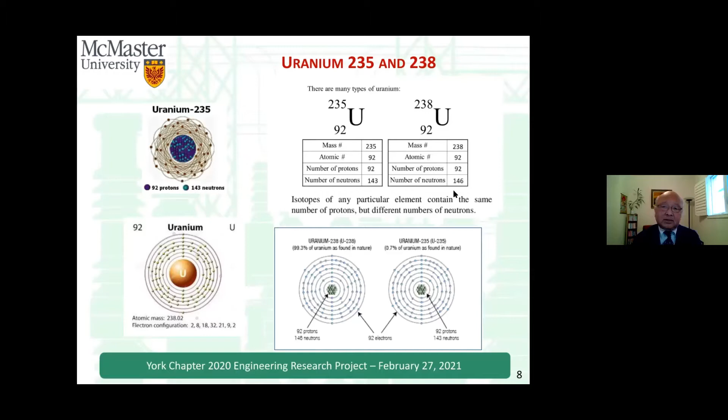Next, the impact of uranium, you've got to understand fission. When you bombard the uranium atom with one active neutron, it splits, generating more uranium isotopes, it could be 236, 238, radium, or other active nuclear elements. When it does that, it releases a lot of energy in addition to extra protons and neutrons. These neutrons, if allowed to bombard the next uranium nuclei, will cause it to split, releasing more neutrons, more energy, and more gamma rays.

And then the whole process is fission. It creates a chain reaction. This is what we find in a nuclear bomb. So what do we do? We have to control the process, the chain reaction.

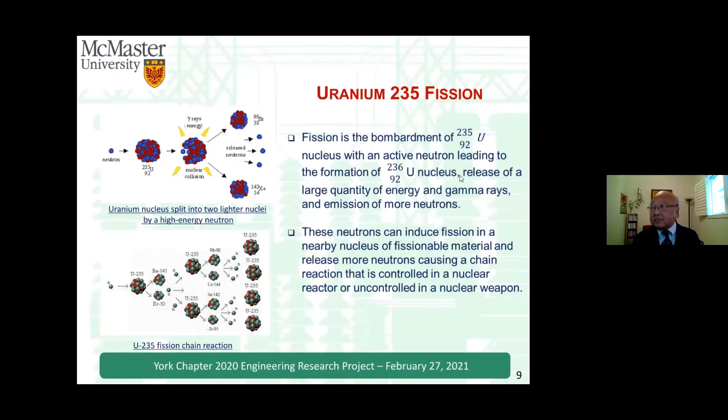Next slide, please. This is what the nuclear fuel looks like. It comes in pellets, and they are all lined up inside the uranium rod. This is what it looks like in a nuclear reactor.

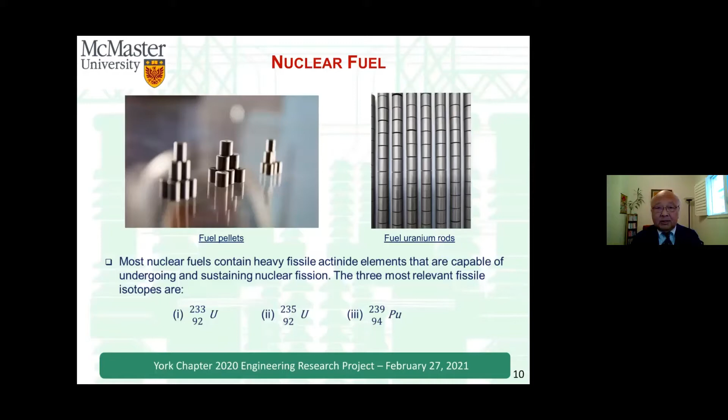Next slide, please. Inside the reactor, to control and make sure that the neutrons do not bombard and cause a chain reaction, we have control rods. These control rods are made of boron, cadmium, hafnium, or other elements that absorb the neutrons to prevent reacting.

So if you allow the control rod to sit inside the reactor right down to the bottom, it will absorb the neutrons. If you do not bombard the elements, the whole thing stays stagnant, it stays as is. The minute you bombard with a neutron, the reaction starts.

By allowing the control rod to move up and down, you can control the amount of energy generated from the reactor itself. Next slide, please.

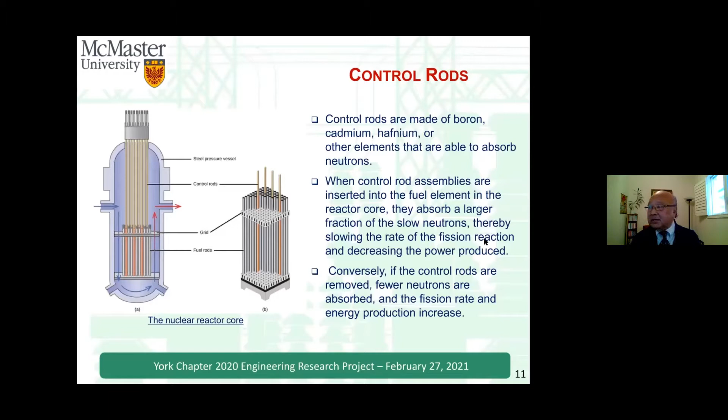So there's a lot of research done all over the world on these small modular reactors. The one I'm going to address today are the 5 reactors being developed in different countries: the US, Canada, China, Germany, England, India, etc.

The first one I'll look at is the water-cooled reactor. Next slide, please. This reactor is water-cooled. It can generate up to 60 megawatts of electricity, reach core temperatures of about 314 degrees C, and uses enriched fuel, only 5%, using uranium dioxide. This is one of the SMRs being looked into.

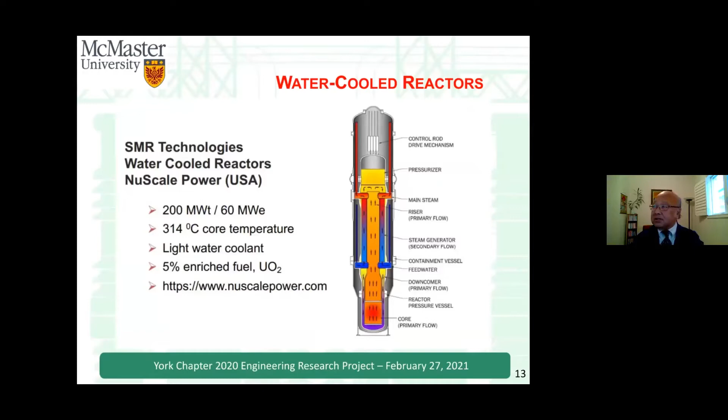Next slide, please. We have the high temperature gas reactors. It can generate up to 272 megawatts with a core temperature of 750 degrees C, and uses helium as a coolant. It uses only 20% enriched fuel, using what we call TRISO fuel, standing for tristructural isotropic fuel. This is done by a company in the US named Framatome.

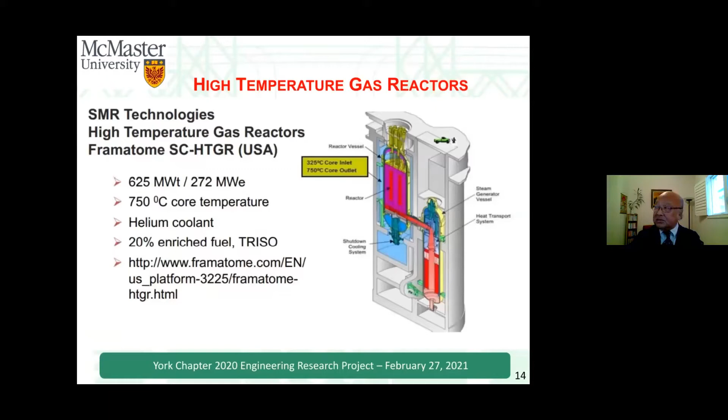Next slide, please. In this new SMR, they use liquid metal for a fast neutron reactor. It can generate up to 100 megawatts of electricity, core temperature 510 degrees C, using sodium as a coolant. Again, they use only 17% enriched fuel, using uranium-zirconium alloy.

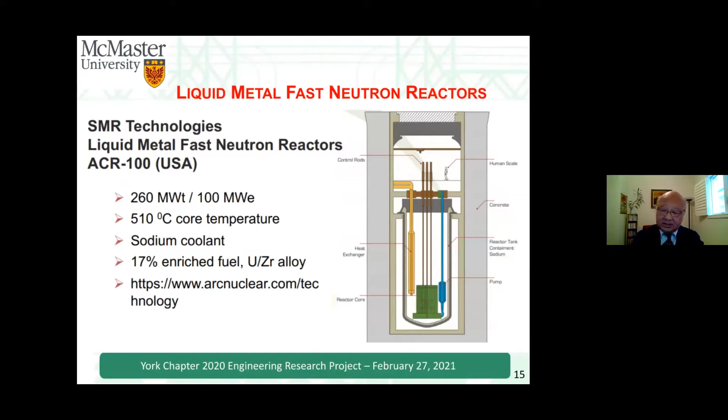So all these nuclear reactions and the energy released from the uranium is harnessed to boil water, we get steam, and the steam drives the turbines and hence generates electricity.

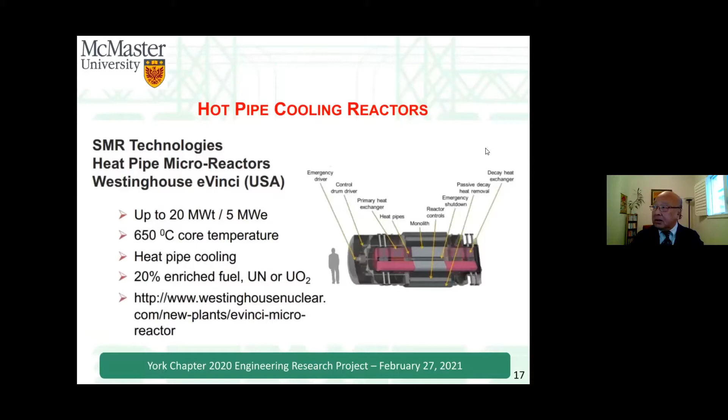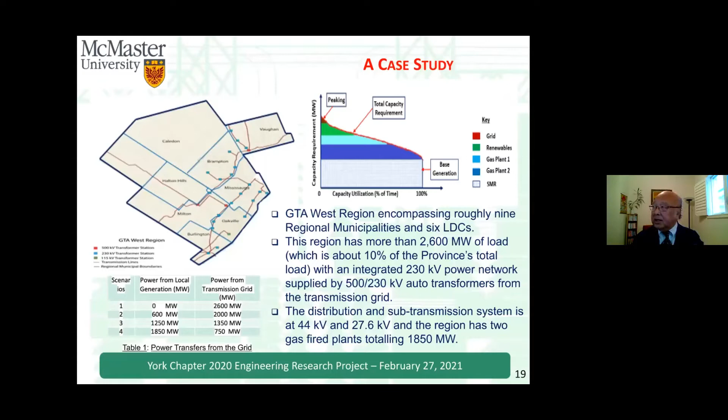Oh yeah, okay. Now on page 19, we do a case study. What happens if you were to replace the power that we import from the grid? Can we use it? If we do, OPG would reduce the amount of fuel used to generate power. The SMR on page 20 replaces the grid. If we have the generators going from the SMR, we reduce the power import from the grid from T1 and T2.

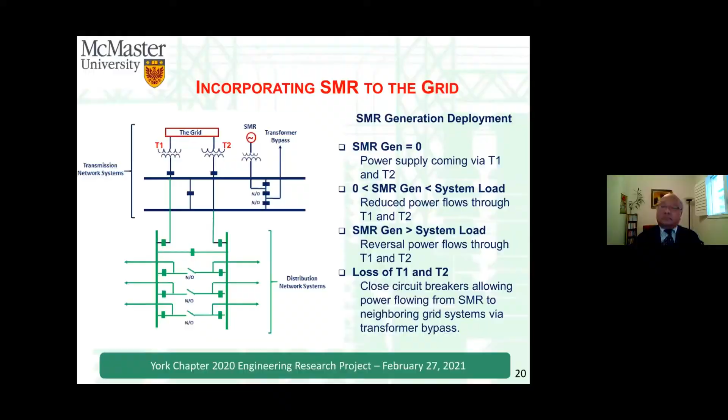Maybe you could give us a better sense of the connections between the climate change solution and the reactors. Are you thinking this is a replacement way of energy generation, or let us know more about how you're connecting the SMRs as the solution for climate change?

Well, everybody believes that going for renewables alone will help combat climate change. No, it will not. Using electric cars won't affect much in terms of climate change because we don't have the structure for it. All households are equipped with 100 amp circuit breakers, new homes 200, but you need more than that. You have to bring in new connections, new wire, new cables in order to use electric cars.

The idea is we have a lot of old generation at the nuclear stations in Darlington and Pickering. These are getting old, so OPG with the government and AECL are working on these small reactors. It occupies only about 5 acres and is relatively safe. If we can use it and have it interconnected within the GTA across northern, eastern, western areas, then we will be less dependent on gas generators. This is one way of combating climate change.

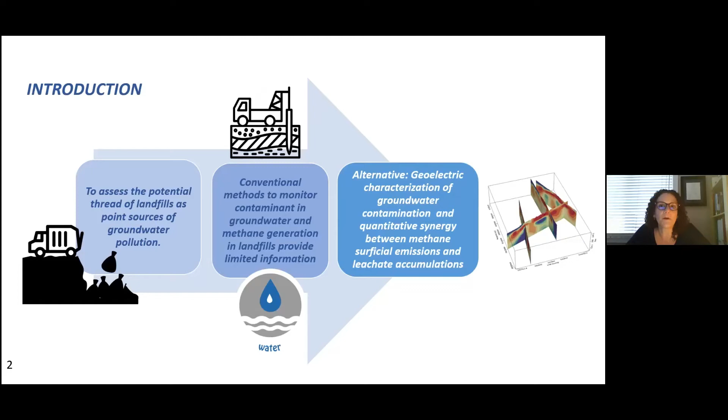It is recognized by the United Nations, by provincial and federal jurisdictions, and also by the Assembly of First Nations that safe drinking water is a main priority, especially for rural communities and urban communities that depend on groundwater as the main source of drinking water.

The advantage of the method we're proposing is that it's non-invasive, low-cost, and will accurately delineate contaminated fluids and gas plume migration. The field data analysis is available immediately after the field work, which makes this a good technique because it helps fast responses to the problem. The quality of the data and the graphical, detailed information will be used for prevention, mitigation, or remediation of contaminated sites.

The methodology of the project was: first we collected a series of geoelectrical tomographs of the subsoil in the landfill. Simultaneously, we collected about 140 methane readings or concentration readings on the surface. Then, using machine learning, we created a model that produced the synergy between methane readings and geoelectrical information.

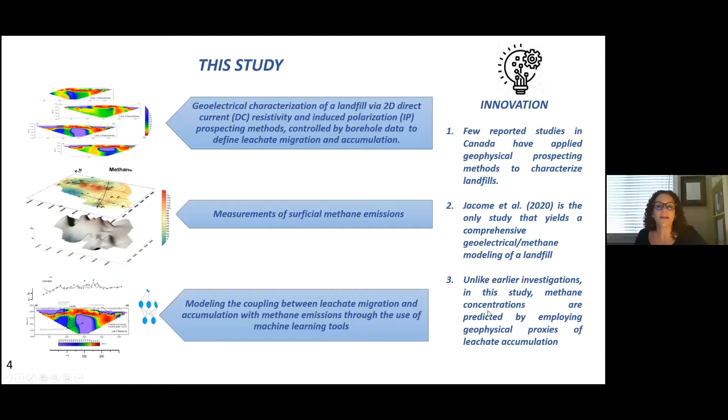The landfill is located in Northeast Toronto, and here are the geomorphological features of the landfill. In this map you can see the topographic map showing the location of the geoelectrical cross sections. Three of them are located in the same direction as the groundwater, and one is located parallel to the landfill.

These geoelectrical cross-sections are about 300 meters in length, and we collected in less than a week more than 5,500 readings of geoelectrical information from the site. Also, at this well, our industry partner collected geophysical well log information that was used to control our geoelectrical modeling.

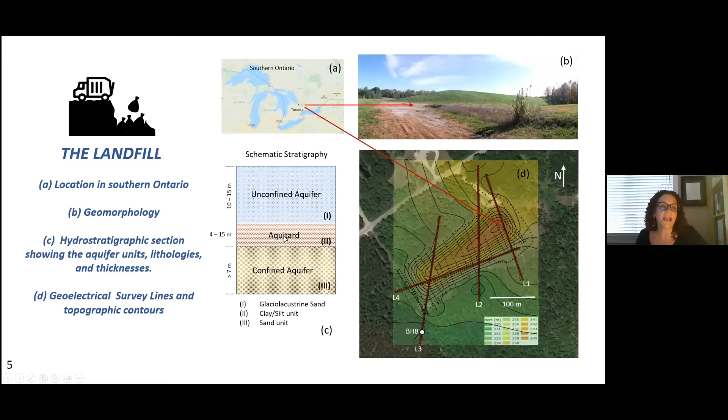The landfill is located in a shallow, unconfined aquifer, and there is a confined aquifer that is divided by an aquitard, a layer of clay and silt.

Here is the result of the geoelectrical cross sections, showing different scales or resistivity values of the subsoil. Red and orange are low resistivity values, associated with saturated soil with salty water or contaminated water. Whereas blues, purples, and greens are medium to high resistivity values, associated with non-saturated soil or soil saturated with fresh water.

The final result of this project was a model done using machine learning, where we use high conductivity values as proxies of contaminated area or contaminated leachate, what we call the waste stabilization zone. As you can see, there is a good match between the observed methane readings, shown as crosses, and the predicted methane concentrations. As a conclusion of these models, we're showing only two examples.

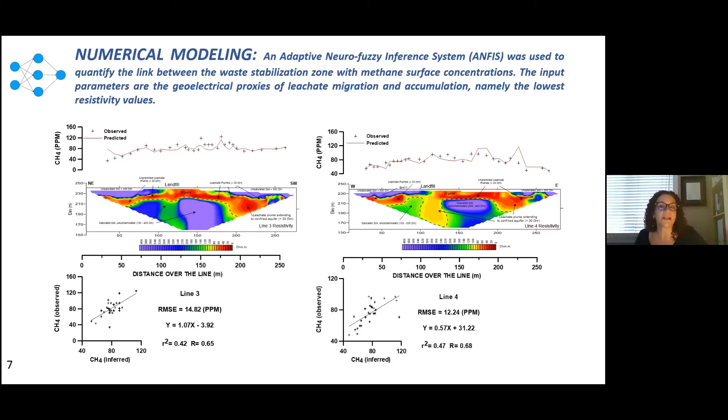We can say that methane readings on the surface can be used as a first approximation of the location of the contaminated fluids underground.

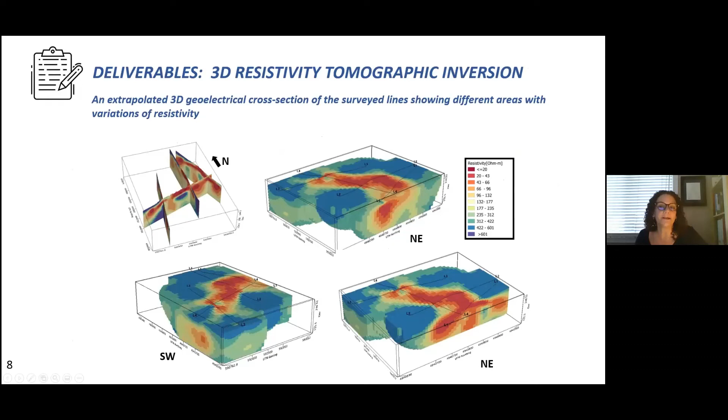Here is a 3D extrapolation of the four geoelectrical tomographs, and as you can see, the quality of information is quite good. We can generate a 3D cube and see and map exactly the location of the contaminated plume. In this particular case, we also found a new plume that was not previously detected by conventional monitoring wells.

Similarly, if we want to drill a monitoring well in the ground, it's a good idea to have a very clear image of the subsurface or the landfill site. This is very important because it helps us drill efficiently where the monitoring wells should be, and it also helps design a more accurate remediation campaign.

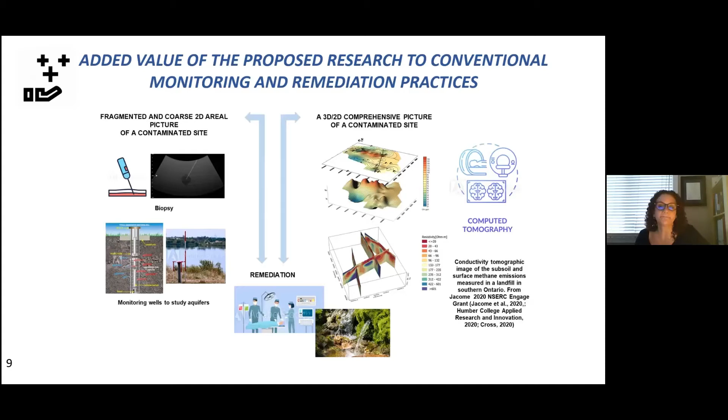Cost studies show that conventional monitoring per well costs about 3 times more than a geoelectrical methane survey of a line of about 300 meters.

Only in the GTA, there are more than 160 closed landfills, and the monitoring cost of these landfills throughout the life of the landfill is about 120 million after they close. So that is actually assumed by the taxpayer.

In particular, in the York region, there is a small landfill in Markham that costs about $150,000 to monitor per year. These figures increase annually and become very important, a financial burden on taxpayers.

Geophysics technologies, or the geophysical method, has been used traditionally by the mining, oil, and gas industries. However, civil and environmental engineers are now actually adopting these techniques in order to monitor landfills.

The main challenge that we found is resistance to change, or resistance to changing the paradigms.

As a conclusion, I can say that this method provides a comprehensive and continuous view of the landfill, which is an advantage over the fragmented picture of conventional monitoring. It improves landfill characterization and monitoring techniques at a significantly lower cost and reduced time, which translates into savings for taxpayers, and helps to make rapid decisions about prevention, mitigation, and remediation of contaminated sites.

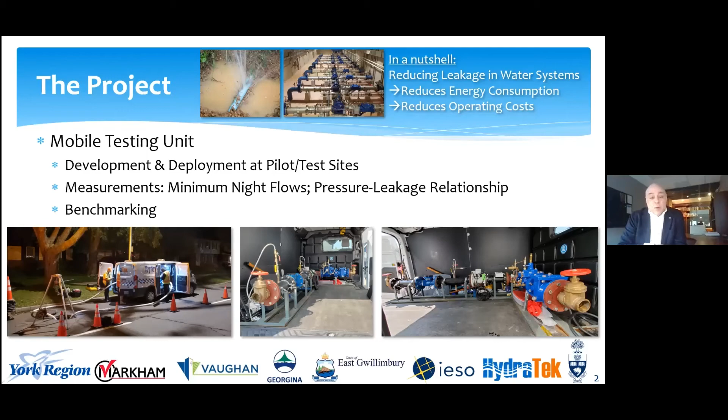To that end, this project involved the development and deployment of a mobile testing unit, pictured here. Its function is to obtain key measurements that can diagnose whether a test site is performing well or poorly from a leakage point of view.

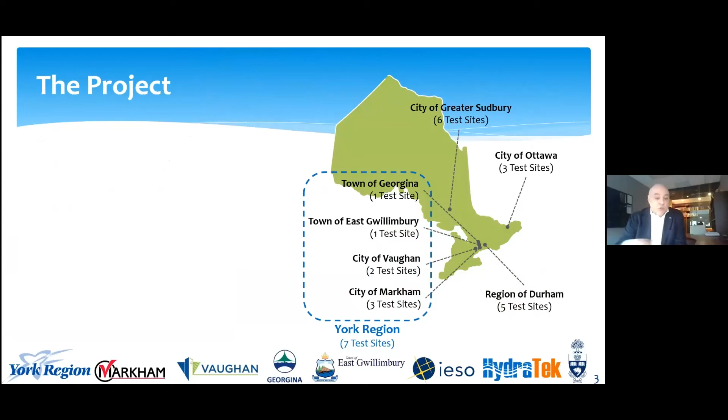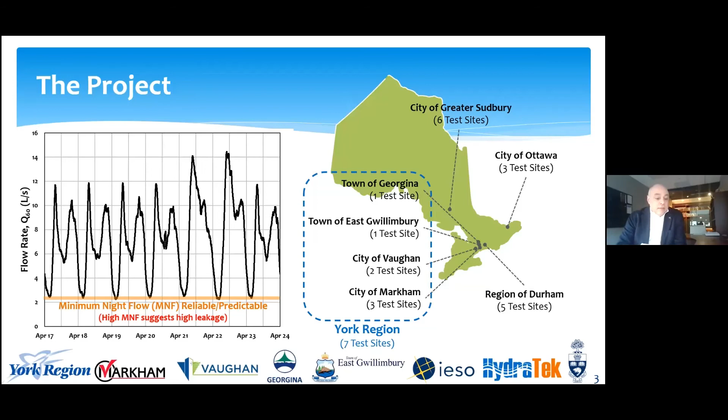This plot shows what several days of water flowing into a typical test area would look like. One of the key underlying technical principles is that the minimum night flow in our water systems, as identified by the horizontal orange line in this plot, is both predictable and reliable. A high minimum night flow is indicative of excessive leakage.

A quick word about the key players involved. Bradley Jenks was the principal researcher for this project, which formed the cornerstone of his Master of Applied Science degree in Civil Engineering from the University of Toronto, under the academic supervision of Dr. Bryan Karney.

HydraTek and Associates was the project's industrial partner, and I was the responsible engineer on the project. The whole project was made possible through the financial support of the Independent Electricity System Operator of Ontario, IESO, through its Grid Innovation Fund, in recognition of the amount of energy needed for water supply to our cities and towns.

Additional funding was supplied by the National Research Council's Industrial Research Assistance Program, the Natural Sciences and Engineering Research Council, and the Mitacs Accelerate Program. Quite importantly, the support from participating municipalities in providing test sites, as well as engineering and operations staff time, was critical for the success of this project.

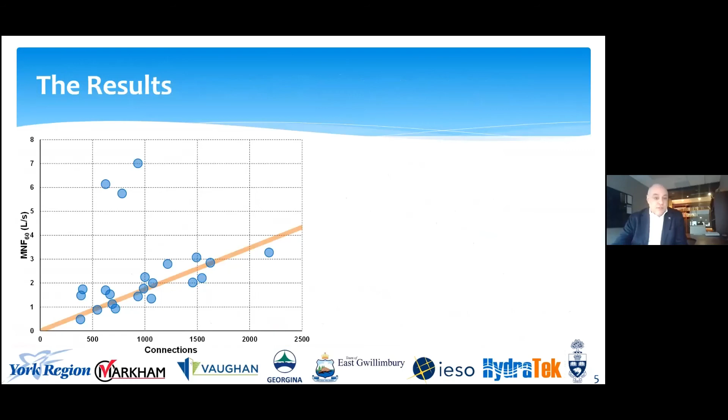Here's a snapshot of some of the key results. This plot shows the minimum night flows for each of the test sites that were looked at. As you can see, there is a large cluster that lies roughly along a linear trend line, which can be classified as generally healthy test sites, and from which we can establish an industry benchmark.

There are also some very clear outliers. These are the ones we're most concerned about. This metric alone can diagnose whether test sites have excessive leakage, as well as roughly the amount of that leakage.

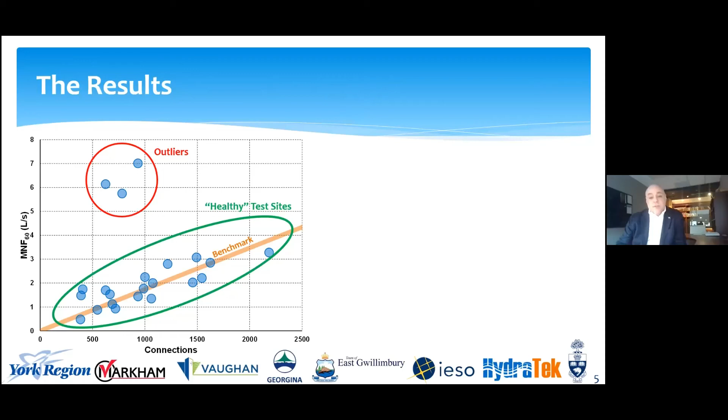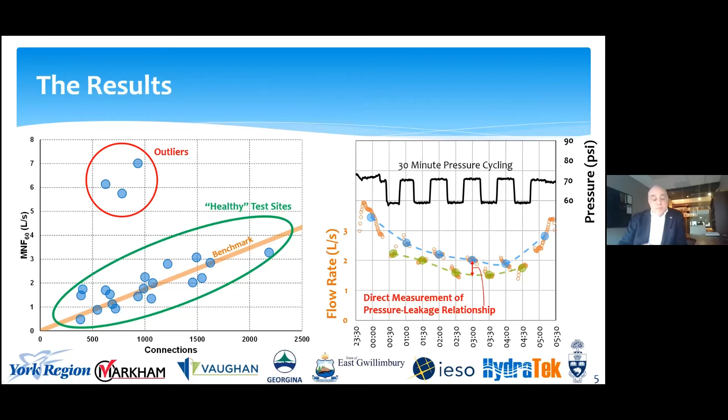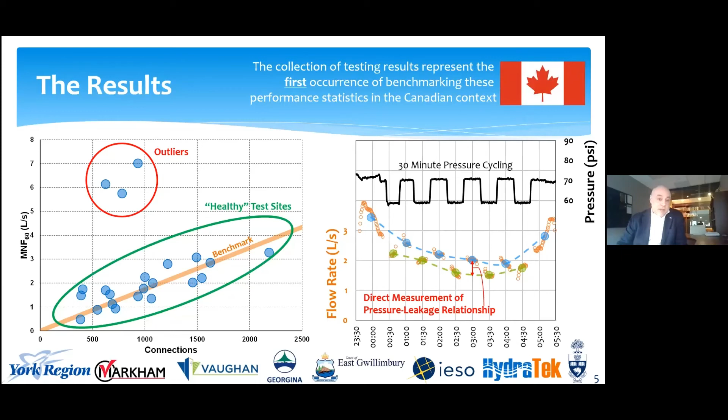This is the first time that any such benchmarking has been undertaken in Canada, as well as North America for that matter. And that's important, because the design of our systems is quite a bit different from other parts of the world.

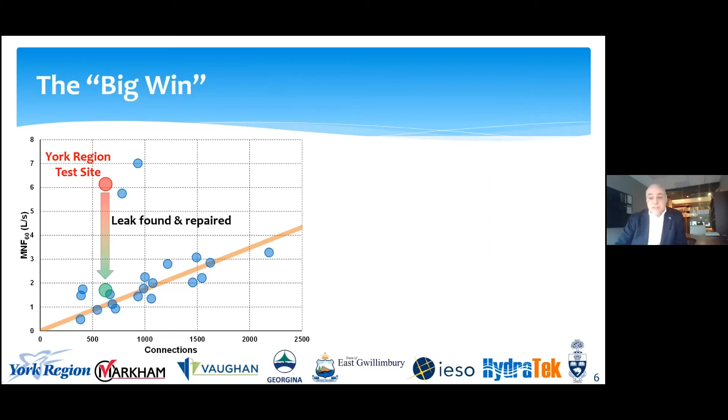So here we see the true proof of concept for this research project, provided by one of the test sites whose initial results were represented by one of those outliers. The municipality used those findings and focused its efforts to find and repair a significant leak. After retesting the site, its performance matched that of its healthier peers. This was quite an exciting outcome, resulting in savings of a staggering 140,000 cubic meters a year.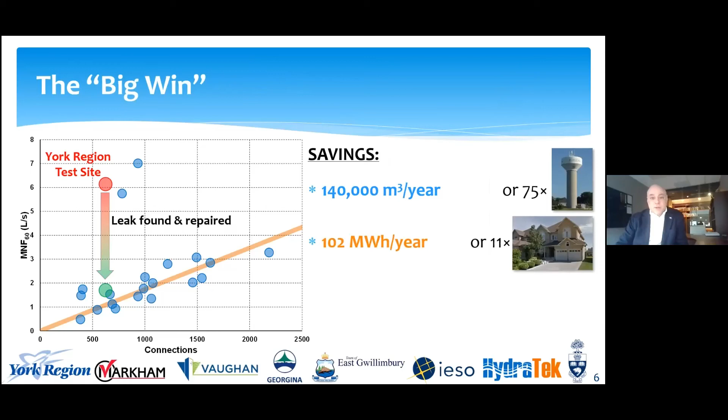That's 140 million liters a year, or about the equivalent of 75 of those elevated tanks you see on the screen — the amount of volume per year that was being lost through that particular leak. It amounts to 102 megawatt hours a year, or 5 tons of carbon dioxide in terms of greenhouse gases, or enough to power 11 of my homes in a given year.

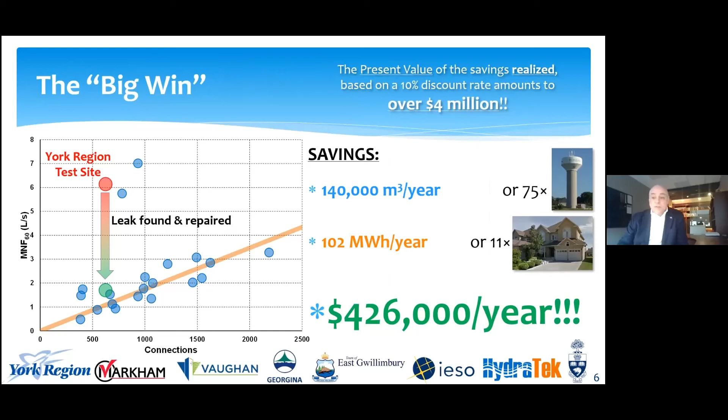Quite dramatically, the financial savings is really where the attention is on this particular slide. The annual savings here is $426,000 a year, the equivalent present value of which was well over $4 million — rather healthy, and that was from a single leak.

In terms of innovation, technical merit, and distinction, key points I want to make include that the mobile unit is the only one of its kind in the world, and that the testing unit and the technologies integrated within it result in highly accurate results that can be obtained at a much lower cost than currently available alternatives.

By virtue of the mobility of the unit, it is also faster to implement than permanent options. It is better, faster, and cheaper than the alternatives. In effect, the mobile unit is equivalent to what can be accomplished by an underground chamber that would otherwise cost several hundreds of thousands of dollars.

The research project was recently referenced in two presentations by US practitioners at the IWA, the International Water Association's Water Loss Conference, held virtually in China this past November. Here are the slides from those presentations, which have independently recognized the contributions that this project has made to the industry so far.

In terms of environmental and social sustainability, this quote from Dr. Bryan Karney at the University of Toronto in regards to the water energy nexus nicely describes matters: if you are thinking about big challenges and big threats, and those topics that are likely to dominate humanity over the century, you might want to think of water and energy.

As well, the water energy linkage that this project addresses is promoted in the Environmental Commissioner of Ontario's 2017 report titled Every Drop Counts. This report is aimed at promoting energy conservation in municipal water systems, noting that municipal systems could save water, energy, and money by just reducing leaks. This project has proven the degree of savings attainable for all three of those dimensions.

Onto commercial viability. This project has proven the value of the mobile testing unit as a diagnostic tool for identifying areas with significant leakage.

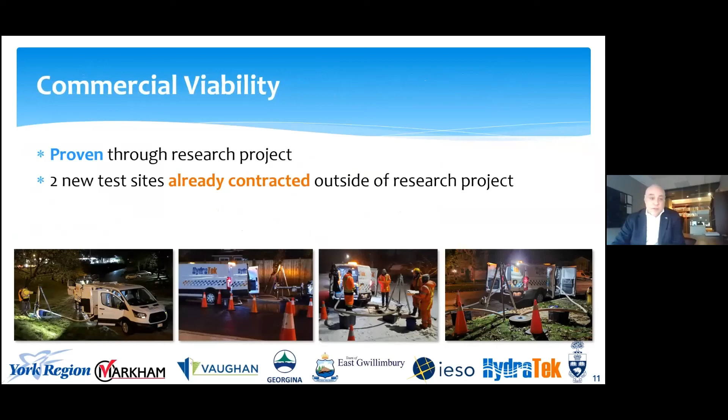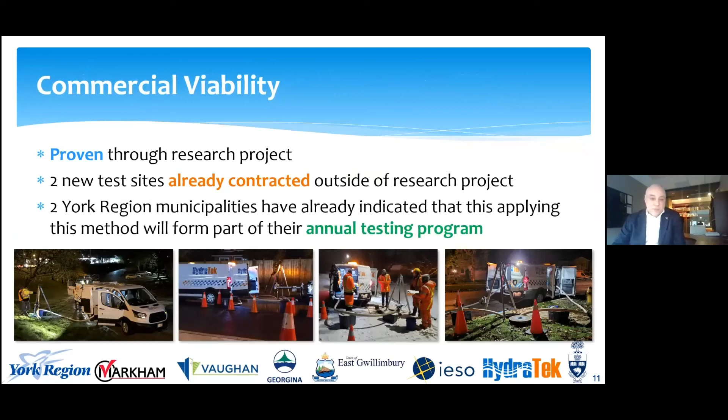We have two new test sites already contracted outside of the research project, largely as a result of the big win that was discussed earlier. And two municipalities have already indicated that they will start programming for this sort of testing as part of their annual work programs. So those are all great things for outcomes from this project.

Apart from that, the mobile unit can also be used for other purposes, given its ability to measure flows and control pressures. Things like billing meter verification or the commissioning or acceptance testing of newly installed infrastructure system components are examples, but others would exist as well.

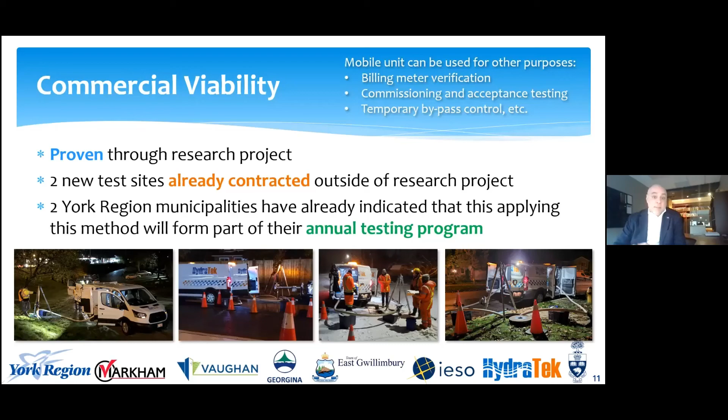In terms of impacts, this pilot project and the big win that was discussed earlier was featured in York Region's 2020 Long-Term Water Conservation Strategy Annual Report. This is important because York Region has the highest cost of water in Ontario, and so any leakage reduction will have the largest financial benefit.

And of course, now we have benchmarks that are relevant in the Canadian context, and so all municipalities will have access to this publicly available information and use that for their benefit.

So with that, I'd like to thank you for your attention. Appreciate that a lot of ground has been covered in a short time during this presentation. I'd be happy to answer any questions at this time.